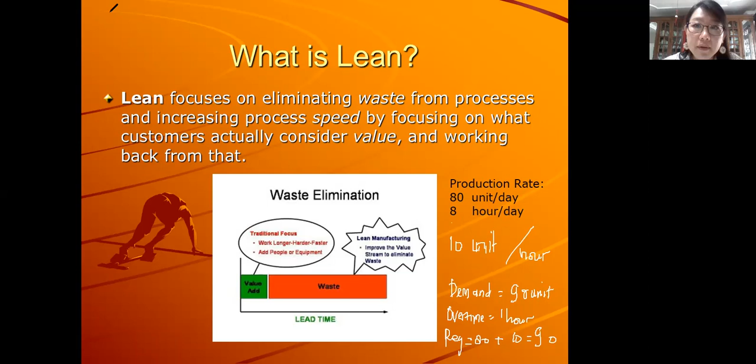So what happens if our demand is not 90 units but about 160 units? Rather than doing overtime for 8 hours, maybe we consider buying another equipment, like another machine with the same production rate. So we increase from one machine to two machines. We wish that we can increase the capacity from 80 units to 160 units in order to fulfill the demand. This is sort of how the traditional way of thinking works.

We used to work longer and then add people, add equipment, do overtime, buy machines, and duplicate or add one more shift like that.

Now we will talk about the difference with lean thinking. If we can see the pictures, we have the lead time here, it's about 8 hours, to produce 80 units per day. One day we have 8 hours.

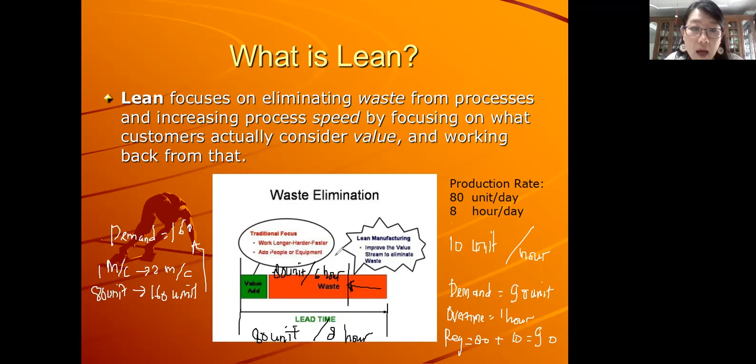So if you can produce 80 units in 6 hours, let me calculate the new production rate now. 80 divided by 6 is about 13.3 units per hour.

You can see we have improvement now. Previously, our production rate was 10 units per hour. Now it's 13 units per hour.

So when we work about 8 hours, multiply 13 by that, we already have 106 units. So if you have a demand of 90 units, traditional would do overtime, but lean no.

Even working for 8 hours, you can already produce 106 units per day. You don't need to do overtime, but you also have a more efficient process to support increasing your production rate.

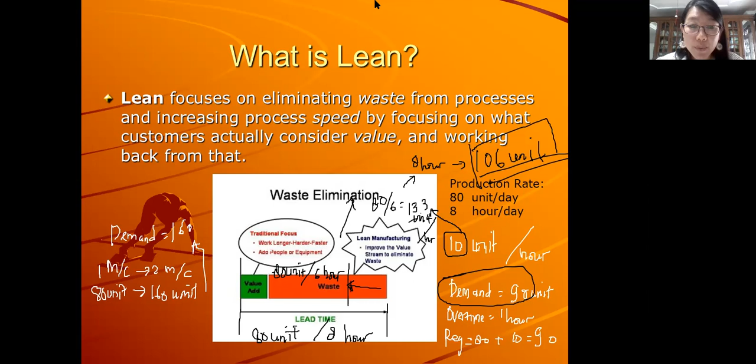Okay, next slide talks about the brief history of Lean. You can see from the slide several names like Taiichi Ohno, Ford, Japanese production, Japanese company Toyota, and Womack, Jones and Roos.

Lean is truly a concept that comes from Japan. At that time, it's different from the mass production principle that comes from the Ford company. We also call Henry Ford the father of industrial engineering, or the father of mass production.

We learned the concept of mass production from the Ford company. But a different thing happened in Japan at that time, because the Japanese automotive industry, after World War Two and the oil crisis, after the post-war period, required small quantities of cars but produced in many varieties.

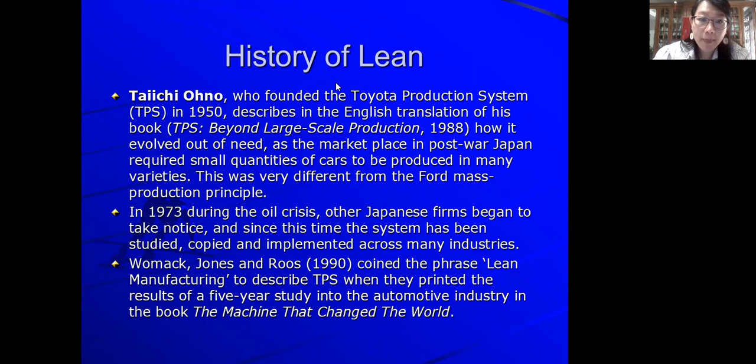After the new concept of lean was known by industry, Womack, Jones and Roos tried to introduce the concept of lean into American industry, in the American automotive industry. You can find the book 'The Machine That Changed the World' - that is how Womack and Jones tried to introduce lean into American automotive companies.

So when we talk about Taiichi Ohno, or the term Toyota Production System, you can see in ULS there is a Toyota Production System basic handbook that you can read. And then I will show you the Toyota Production System house.

You can see this house. Usually a house is built with a foundation. The basic foundations of Toyota Production System are terms like heijunka, standardized work, and stability.

The important pillars of Lean are the just-in-time concept and the Jidoka concept. And the last one is the roof - the objective of the Toyota Production System is to achieve the goal, whether highest quality, lowest cost, or shortest lead time.

So mainly we focus on QCD. This is also something that has been discussed since I was an undergraduate student.

My final project discussed these three attributes in a company - how I tried to manage quality using design of experiments, how I tried to reduce cost using the activity-based costing concept in order to calculate the cost of goods sold, HPP, the right way, so we can get a more reliable manufacturing cost of goods sold.

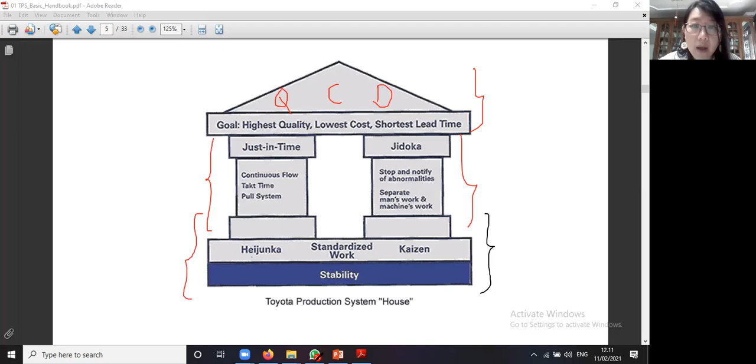So when we talk about the Toyota Production System, I will go back to the slide here.

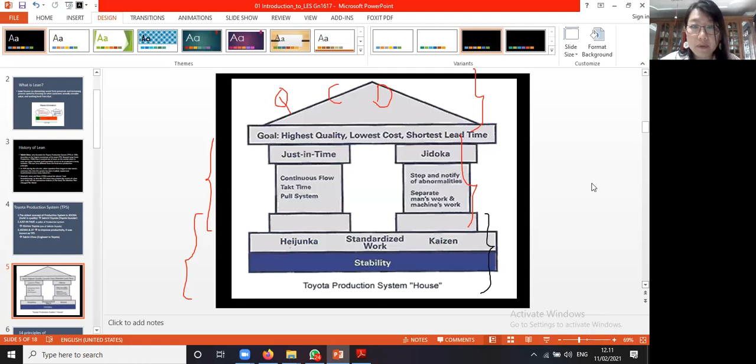So when we talk about the Toyota production system, you will be introduced to the oldest concept of the production system, called Jidoka: how to build in quality. It was introduced by Sakichi Toyoda, the Toyota founder, and then developed further. The son of Sakichi Toyoda, Kiichiro Toyoda, developed just in time, and now Jidoka and just in time have become the pillars of the Toyota production system house. So the two most important pillars of the Toyota production system house are just in time and Jidoka.

Guys, I'm sure that you've heard the term just in time many times in several industrial engineering courses. Just in time is mainly about how you can reduce the inventory level, how you can use less inventory. I myself experience this in my daily life. Before the pandemic, we would do one or two large shopping trips. We bought a lot of noodles, cooking oil, many things, and we spent about 1 or 2 million.

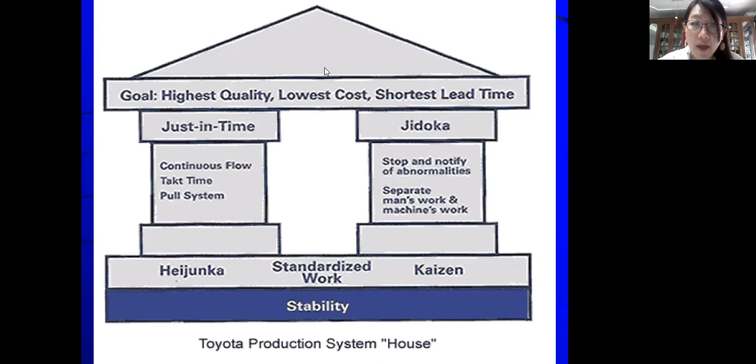So you can see that many processes are done by the machine, the conveyor. There is no idle time between one process and another process. Yeah, this is the concept of how Lean applies to an efficient production line.

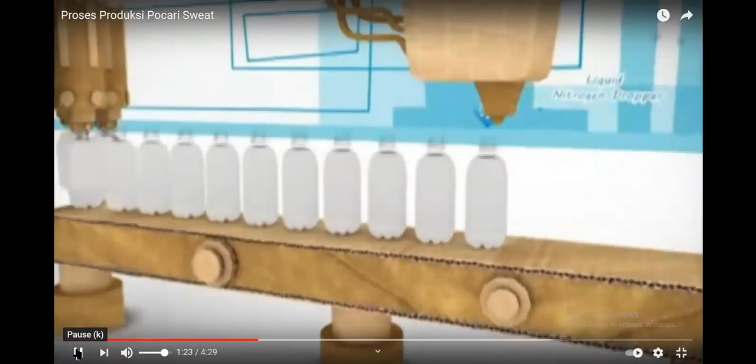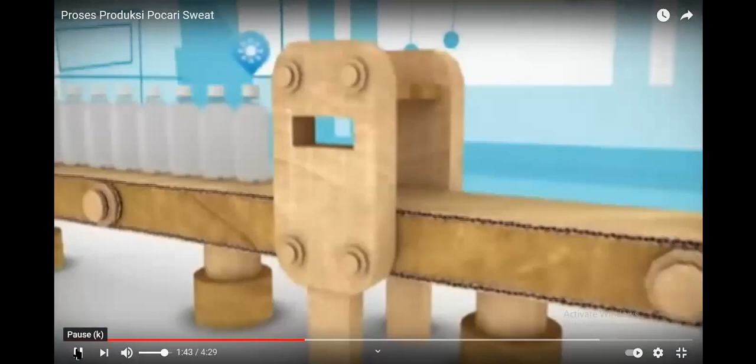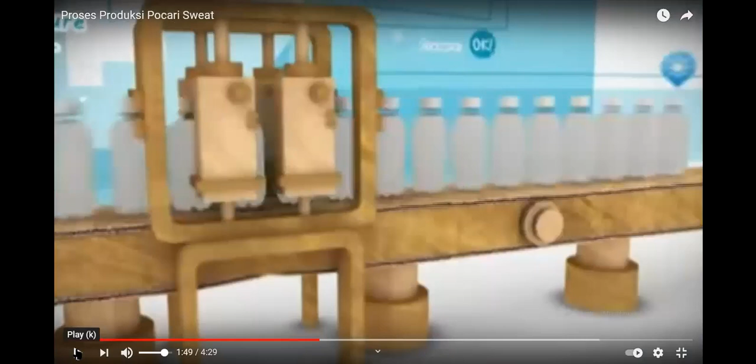So you can see just now there are several checks which are not done by a human but by the machine. So you can see, if the machine checks and the specification is not fulfilled, the defective product will be thrown away.

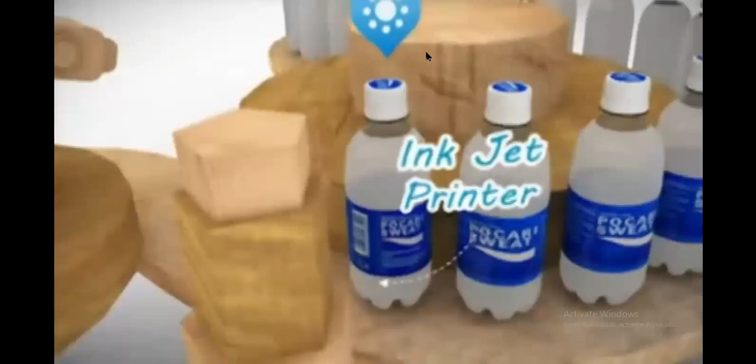So yeah, you see the inspection camera is built into the machine. Yeah, so this is the concept of how Jidoka is applied in the lean production line.

So we are going through the 14 principles of the Toyota Production System briefly, and those 14 principles are grouped into 4 foundations. The first one is long-term philosophy. It means that every time the company wants to do something, they need to have a long-term philosophy, not a reactive action or reactive decision making that considers the short-term objective only.

So principle one says, base your management decisions on a long-term philosophy, even at the expense of short-term financial goals. It means that when we want to fix the process, we think whether we want to repair the existing equipment or buy new equipment. If we decide to buy new equipment, we need to think long term. Is the technology that we buy already obsolete, or is it new and advanced technology?

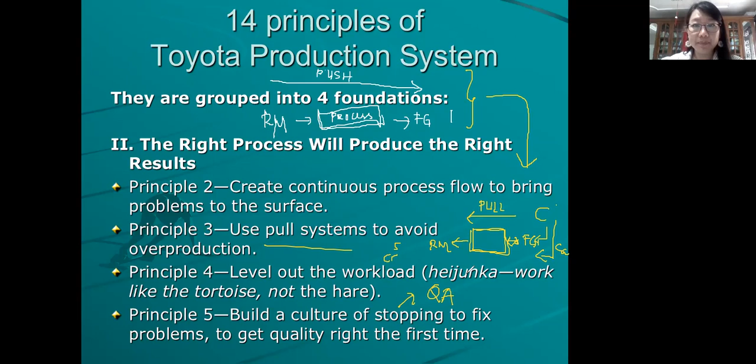Okay, we're still in the second foundation, called the right process will produce the right result. So the lean concept is really focused on, no matter the result, ensuring that the right process will produce the right result. The next principle is principle 6, which says that standardized tasks are necessary as the foundation for continuous improvement.

So I'm so grateful that my team, which consists of several industrial engineering lecturers in Ubaya, produced the standard for kerja praktek dua. We produced a standard panduan teknis that we are so proud to announce to the students and to the industry, so they now know how the internship can be done between students of Ubaya and our business partners, the industry that supplies the internships for the students. Let me show you. Maybe this will be your information.

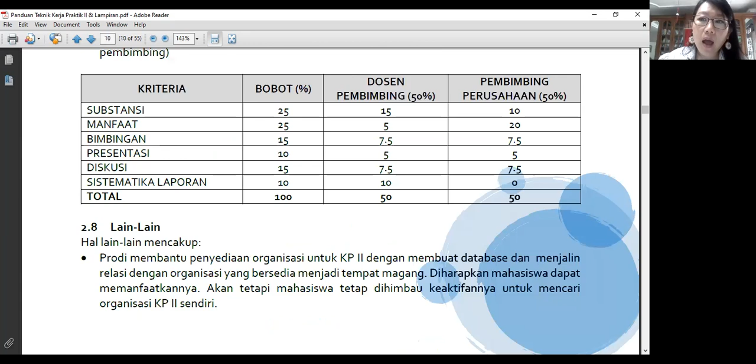So if we already make the standard procedure like this, every student who takes the internship program will behave the same. And also the company, the industry, will have the same perception. It's not only explaining the activity in KP2, it's also explaining how to write your proposal, how to write your report, and how the KP2 will be evaluated. So we will all have the same perception now, and this is the document that everybody knows.

We are so proud to announce this Panduan, because it's hard work, but it will give a better result, because the internship program is one of the most important now in Campus Merdeka, and also in international accreditation. International accreditation or certification also requires that students have the ability to implement their knowledge in a real problem, in practical industry, to give a real solution. And internship is one of the ways to achieve it.

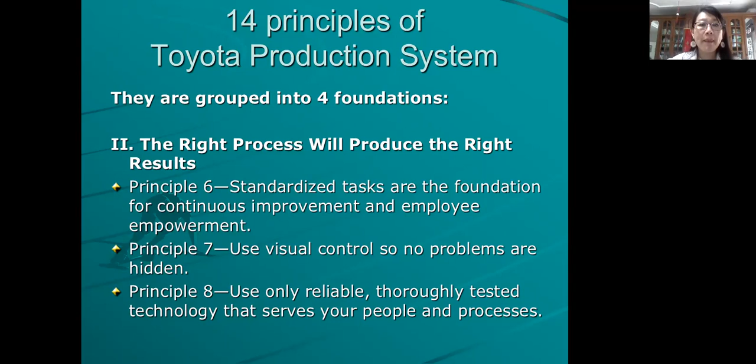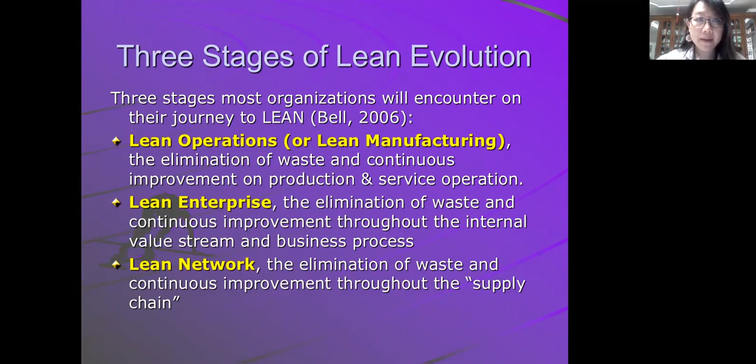The primary activity sometimes cannot flow fluently without support from the support departments like the infrastructure, human resources, procurement, and so on. In the example of the vaccine industry, the supporting activity is like the IT department, human resources department, the purchasing department. We call them the supporting departments.

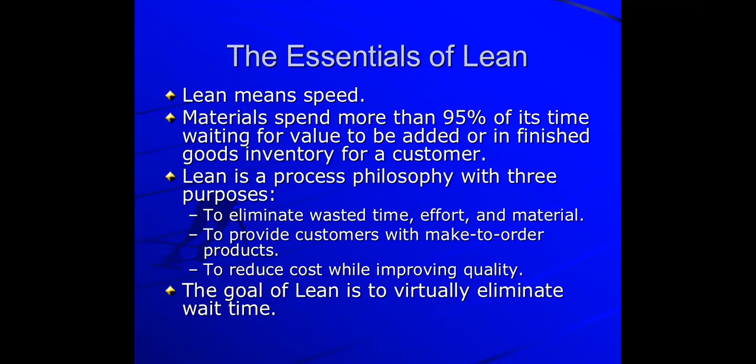The essence of lean is that you minimize the defects, you eliminate the unnecessary activity, so you can improve the cycle time. So it will eliminate the waiting time for the customer to get the product. This is how lean can contribute to quality improvement: waste elimination, the reduction of non-value added activities that I mentioned before, such as unneeded delay.

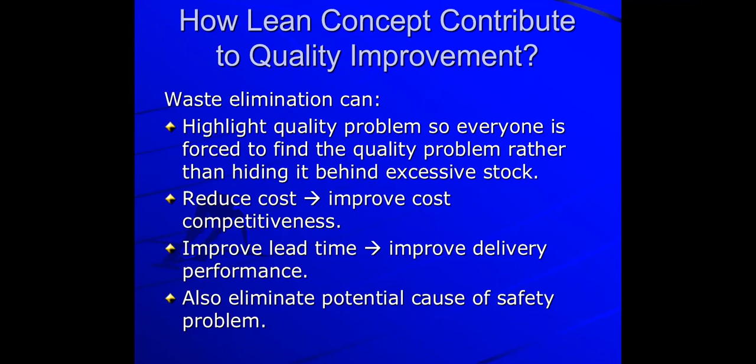You saw the Lego video on lean implementation, how applying lean can help the quality problem: there are fewer defective products and fewer quality problems. Then it will reduce the cost and improve the lead time, and also the safety problems. One application of the lean tools is about how to keep your environment safe.

I always tell my students when they have the KP1 consultation that you cannot increase your price too high, but as long as it's simulation, you can put your profit margin as high as possible. But this is the real case.

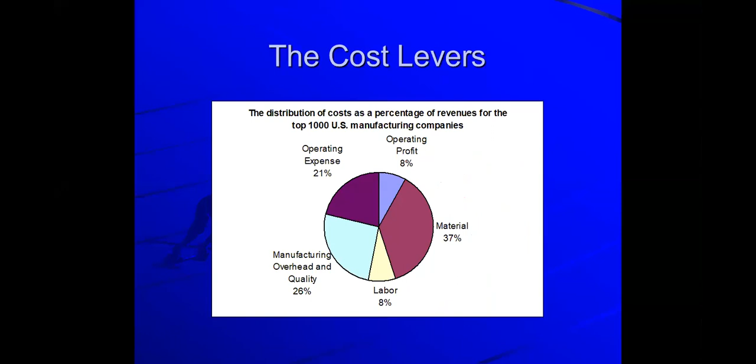Now, what we want to convey to you through this composition is when you're doing the Lean, you can see here, you have to reduce some costs like this. You can reduce the usage of the direct material cost by about 3%, or a reduction of 10%. The 10% comes from the improvement of about 3%. From 30 down to 27 is a difference of 3%, and the initial percentage is 30%.

So you have an improvement of about 10% if you apply Lean into your enterprise system, and you will get the future prediction like this.

Lean didn't concern about the reduction in labor. We didn't discuss it here, but the concept of the Toyota Production System related to the Muri concept talks about changing the environment, using ergonomic working conditions which might increase the comfort of the laborers, which impacts a faster working time.

We can also reduce the overhead, because we talk about how to work faster, so the machine will work less than regular, less than previous. So we also have a reduction in the factory overhead.

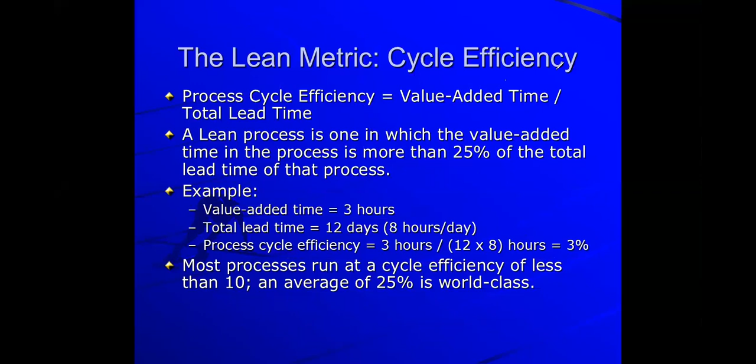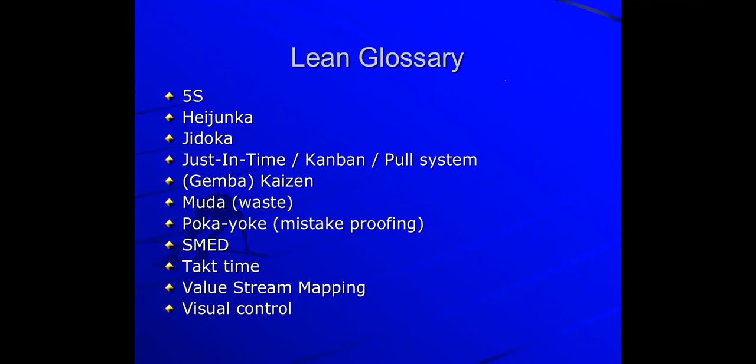And it should be handwritten. Why? Because we do a lot of things using the laptop, online. People are encouraged to write down using their hands, it's a psychology problem. It will increase your understanding when you're learning something while you write it down again using handwriting.